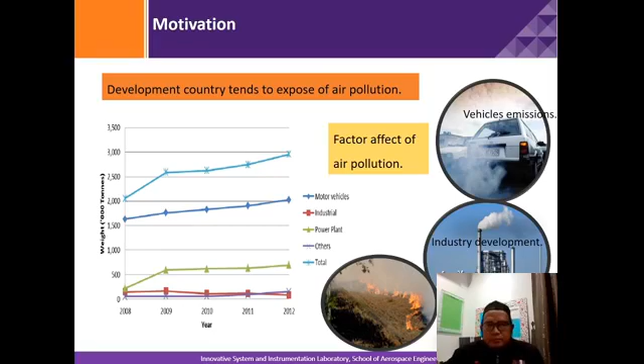Okay, let's look at how the number of vehicles increases. Vehicles such as cars and motorcycles are very popular. For example, once our kid has graduated, for sure we will buy them a car. So it will increase gradually from one family one car, now to 3 cars, 4 cars. But when vehicles lack proper maintenance, for sure the internal combustion engine inside will emit harmful gas.

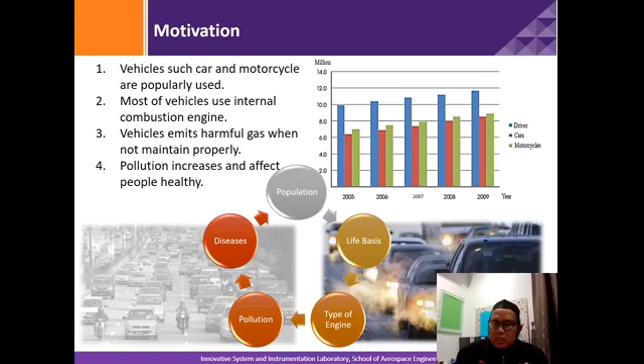And moreover, when the pollution increases, people's health will also be affected. So as we see, the number of drivers increases, the cars and motorcycles also increase. So this is our life cycle, where we have population, we have lifestyle, and then we have type of engine, contributing to pollution, and lastly we face difficulty with the disease issue.

Okay, internal combustion engine: emission is caused by incomplete combustion such as engine misfire. This misfire, actually we cannot hear it directly unless we attach some sensor inside the system so that we can identify the misfire. The importance of engine misfire detection, or EMD, is to ensure the engine emission is not harmful to the environment and to avoid damage of the catalytic converter.

A low-cost narrowband oxygen sensor is used to acquire the air to fuel ratio, or AFR, so its behavior under misfire conditions can be analyzed. So in this particular study, we use DFT, and then from the DFT we do some filtering in order to identify the particular misfire features.

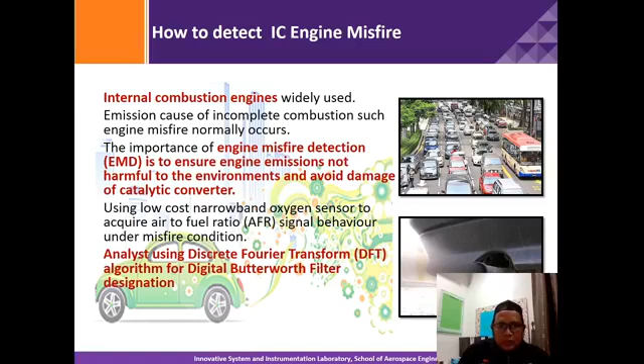Okay, and then what can cause this misfire? Basically there are a few considerations: faulty ignition control, unstable ignition system, leaky combustion chamber, fuel ignition issues, unsuitable air to fuel ratio AFR, and a dirty intake manifold sensor. So engine misfire is defined as the engine's loss of its ability to ignite the mixture in the combustion chamber at a particular moment.

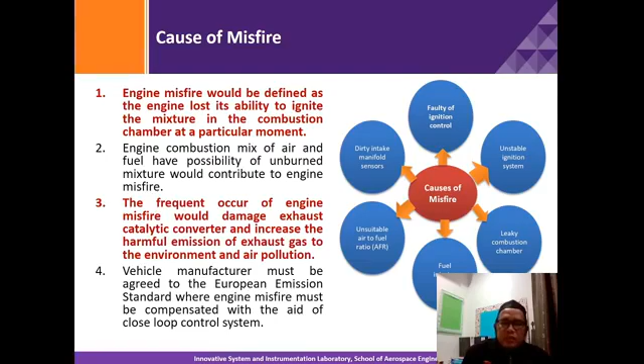As we can see, when the engine combusts the mix of air and fuel, the possibility of unburned mixture will contribute to engine misfire. Engine misfire will damage the exhaust catalytic converter and increase the harmful emission of exhaust gas to the environment and air pollution. Moreover, for the vehicle manufacturer to follow standard regulations such as the European emission standard, the engine must be compensated with the aid of a closed loop control system.

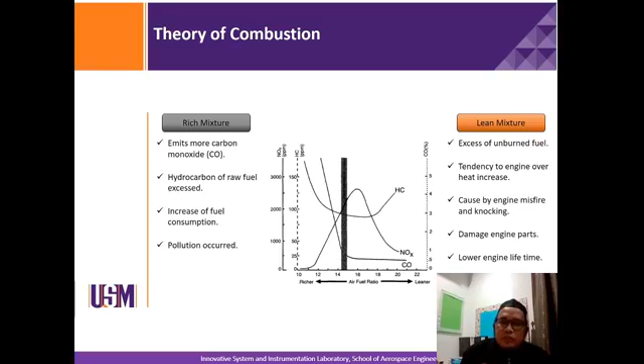So if we calculate on the ideal combustion engine, and we see in the graph, we can see the tendency of the transient response of the good mixture given by this graph, and the unbalanced mixture given by this graph. So the unbalanced air-fuel ratio will cause the misfire. The rest is about regulation, efficiency, and the cost.

So now we talk about our objective: how we can model our engine in order to get the misfire signal. Then we need to design a simulation system in order to observe the misfire signal, as we can use the narrowband oxygen sensor as modeling. And then when we have that model, we design some actuation through artificial misfire on the real engine for misfire signal acquisition, so that it can be analyzed through various signal pre-processing parameters and methods.

And once we have this particular understanding, we are able to develop the algorithm for engine misfire detection that is capable of counting continuous misfire occurrence at different engine speeds.

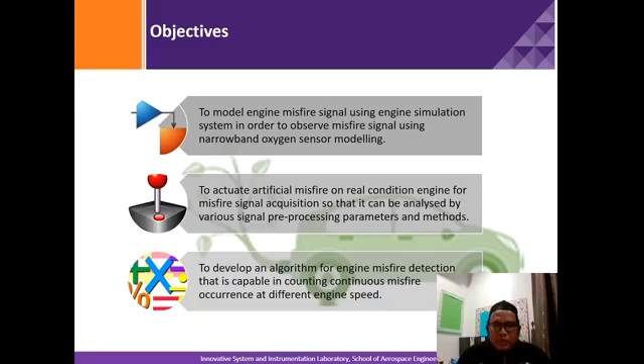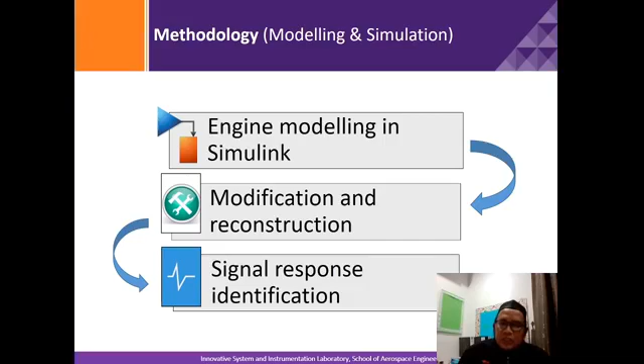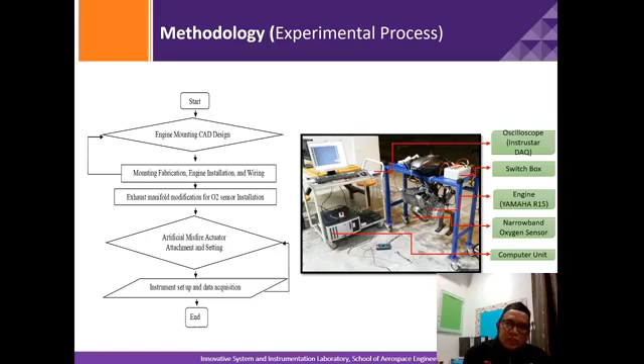So we start with the engine mounting design in CAD, and then we have the installation of the wiring, and then the manifold modification in order to attach the oxygen sensor, and then we have the artificial misfire actuator system. Finally, we have the instrumentation to set up the data. Previously, we were using what we call the DAQ. Instead of that, we developed our own controller.

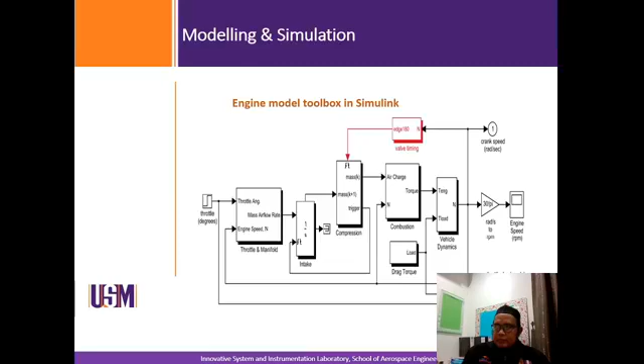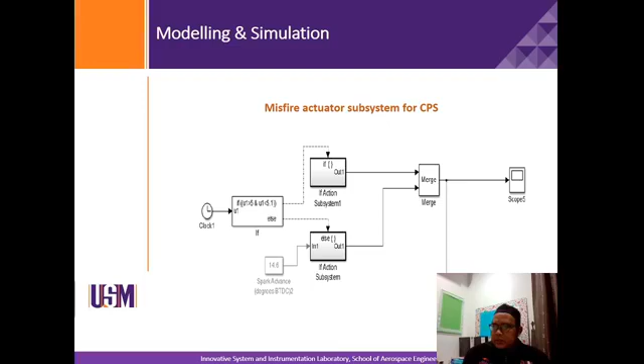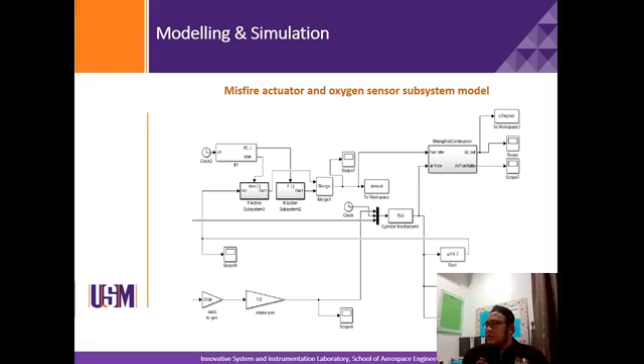And this is the typical engine model toolbox we designed in Simulink. So we have a throttle, the manifold, and then the engine and combustion, and then we can display the engine speed and so on. Okay, in order to actuate the misfire actuator subsystem, this is the idea how we can merge, and then we can display the scope. And when we combine the misfire actuator and oxygen sensor as a whole model, it represents the modeling system. So we have all this Simulink-related work.

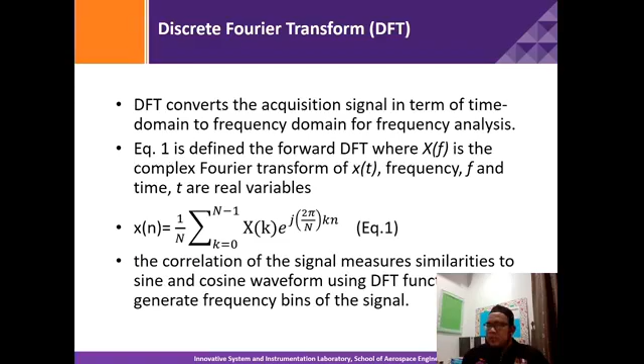So this is the FFT. Everybody knows the FFT very well. This is the equation that most of the time we are using, and through the simulation in MATLAB, with certain given parameters, we can detect this phenomenon in the simulated engine. And then when we use the simulator with the oxygen sensor response, we find this is the real condition of the phenomenon.

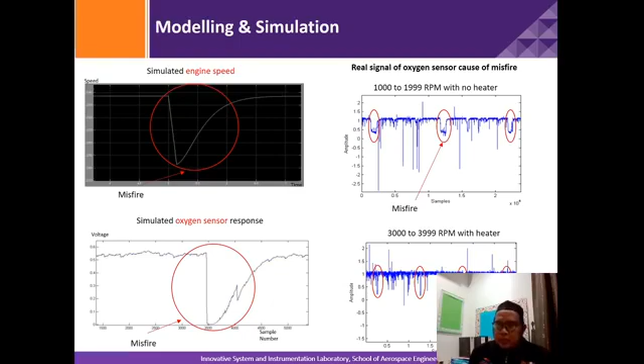And then, okay, we apply the exhaust gas produced by the combustion flow into the exhaust while the oxygen sensor measures the level of oxygen in terms of AFR. The signal produced by the oxygen sensor is acquired by using an oscilloscope at this sample rate.

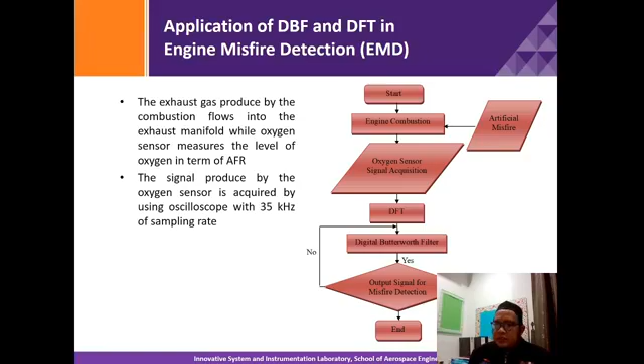In order to analyze the pattern of signal frequency when the misfire event occurs, we use a microcontroller to control the fuel injector behavior in order to produce the misfire. Moreover, when the magnitude of the signal is higher, the noise can be observed. Okay, so a Butterworth filter is designed to cut or cancel the noise frequency that is higher than the misfire signal.

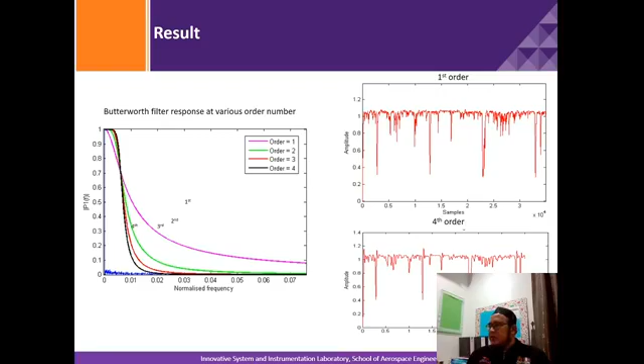And when we compare the misfire detection accuracy, we understand through the calculation that whether we apply the condition of heater off or heater on, the accuracy arrives at 86.66. And then this is another part where we apply the DWT. This is level 1, level 3, and level 7, as we see from the previous slide.

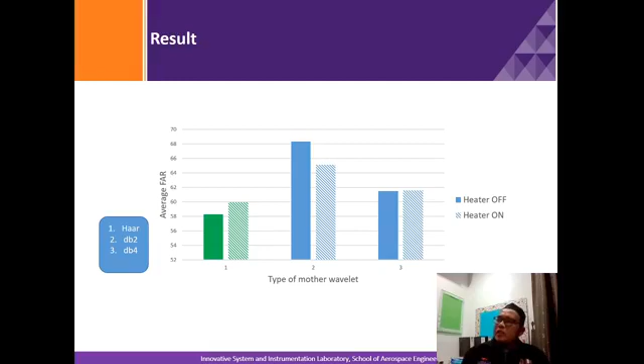And then this is when we apply Haar, db2 and db4. This is the performance where we apply heater off and heater on. And then this is the level of misfire detection accuracy through the DWT.

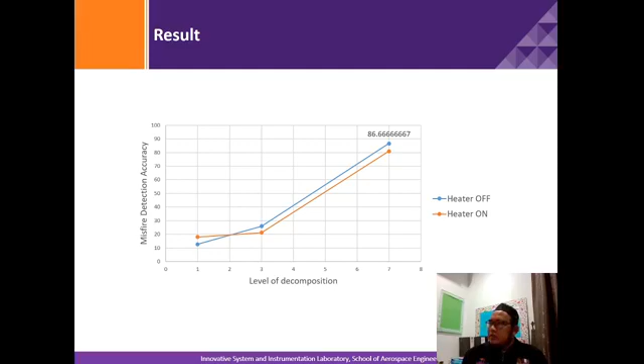So, as the result and discussion, the oxygen sensor signal acquired by the oscilloscope will have noise at a different frequency, and the signal drops when the misfire occurs because of lean combustion. Good signal filtering increases the detection accuracy, and the signal-to-noise ratio, SNR, is measured as the reference of EMD performance. So we calculate the SNR before and after filtering and get 15.97 and 34.76. So it is roughly double the value before and after.

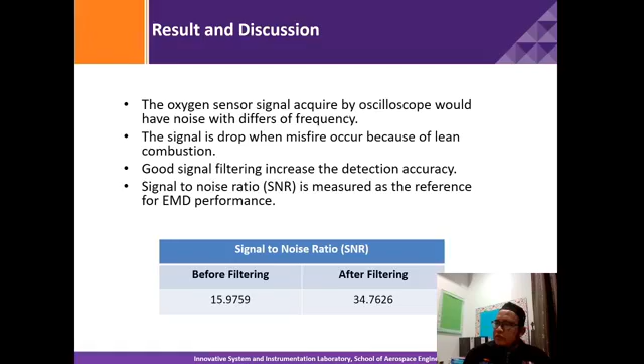So last but not least is the conclusion. The Otto cycle engine is widely produced based on a study of vehicle statistics around the world, and emission of the exhaust can increase. The frequency analysis using DFT is obtained to present the frequency of signal and noise. A second order Butterworth filter is designed.

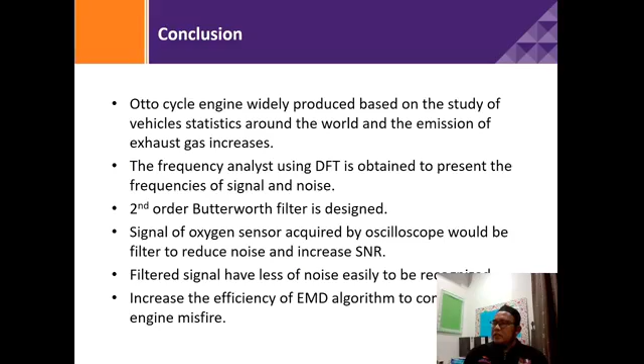The signal of the oxygen sensor acquired by oscilloscope will be filtered to reduce noise and increase SNR. The filtered signal has less noise, is easily recognized, and increases the efficiency of the EMD algorithm to detect engine misfire. So a few publications have been done for these particular studies at Scopus level.

So you can go through the paper topics related to feature identification filter for engine misfire detection EMD, and we also have misfire diagnostic approach for internal combustion engines using a continuous signal acquisition system. And lately we have signal processing for engine misfire detection on vehicles using a closed loop system.

You can find that we also participated in the so-called Innovate Malaysia. We only managed to get a consolation prize due to the niche area, as this particular year favored products related to the community or end users rather than hobby and so on. So to a certain extent we were awarded best paper and so on.